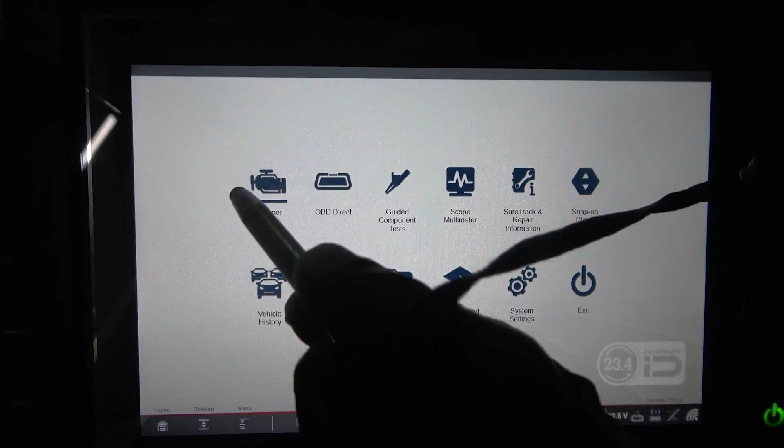Now I'm going to bring it up so we can scan the engine computer. So we're going to go to scanner. So right there, the scan tool has identified the vehicle, 2015 Hyundai Sonata with a 2.4 liter. So everything looks good. We're going to click OK. Let's do a code scan. Let's scan all the control units on the vehicle and see what we got. We're going to do a pre-scan. We have two trouble codes in the engine computer.

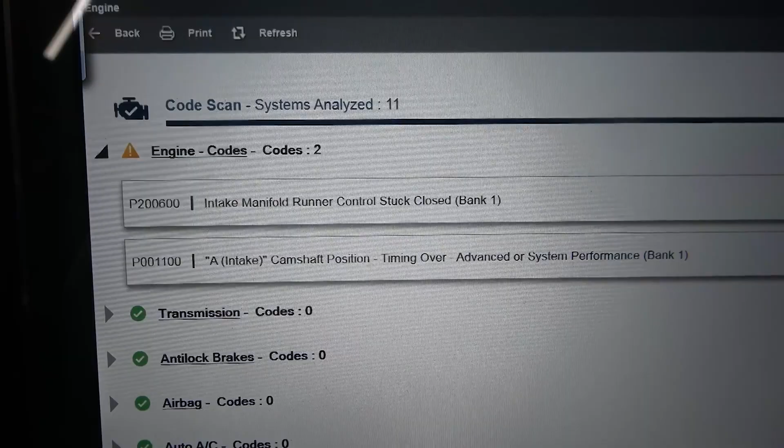Our first trouble code is P200600 and it says intake manifold runner control stuck closed bank 1. And then the second code is P0011 A intake camshaft position timing over advanced or system performance bank 1.

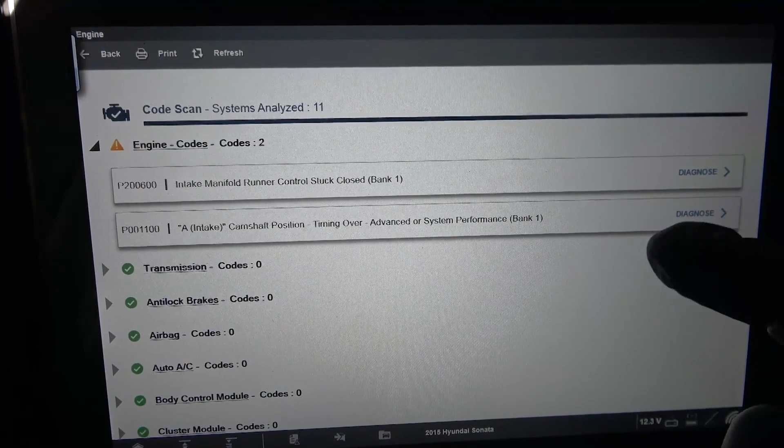Now I'm very familiar with these trouble codes. This first trouble code is usually caused by stuck flaps in the intake manifold or a defective intake manifold flap electric motor. And then the second trouble code is usually caused by a defective variable valve timing solenoid or a sticking camshaft phaser.

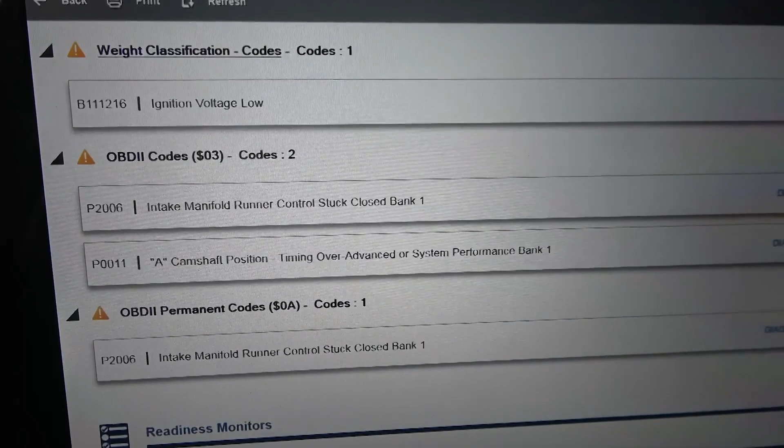So now I'm going to scroll down. Let's see what other trouble codes we have in the other control units. We have one code in the smart junction box, one in the weight classification control unit, and we have these two same codes again on the generic side of the tool. So the first one is P2006 intake manifold runner control stuck closed bank 1, and then the second one is P0011 A camshaft position timing over advanced or system performance.

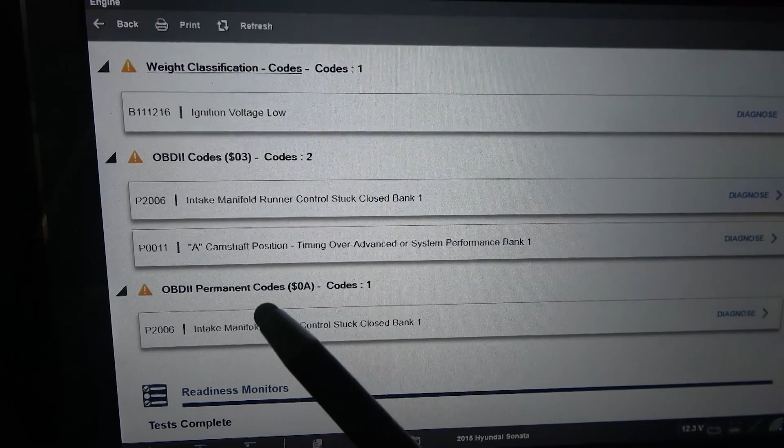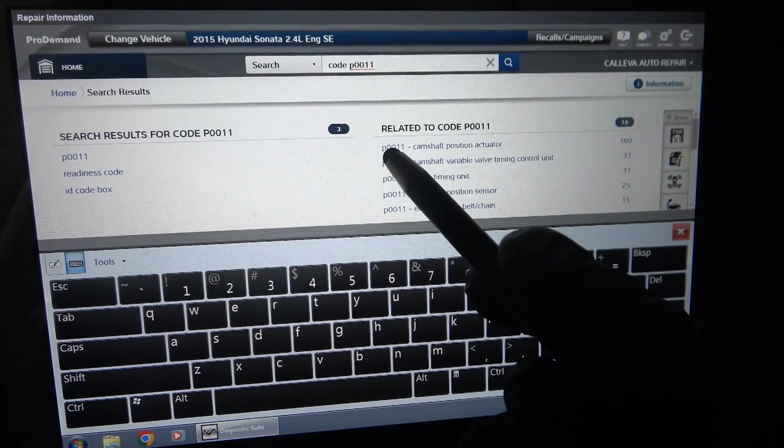Okay, so I'm already familiar with these trouble codes, guys. I don't have to look them up. I've done these several times, but in case you have a question, I'm going to look these up just for you guys. So we're going to look up P2006 and P0011. So let's go to our service information. We're going to look up P0011 first. Let's see what we got. So right here, P0011 camshaft position actuator. Let's click on it.

Now I'm going to go to real fixes first. This is repair information that Mitchell ProDemand makes available to us. This is basically information that other mechanics that have fixed this issue have provided to Mitchell ProDemand, and then Mitchell ProDemand gathers this information and makes it available to us. So when other mechanics like me dealt with this P0011 code, this is what they did. They replaced the variable valve timing control solenoid to fix this issue.

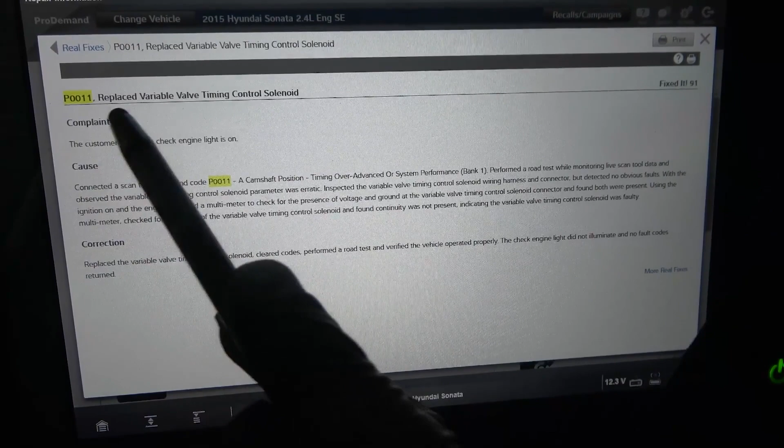And like I said earlier, this code is really common on these Hyundai Sonatas, and the issue 95% of the time ends up being the timing solenoid, the VVT solenoid. Actually, we can read what this guy is saying over here. He's saying that he replaced the variable valve timing control solenoid, cleared the codes, performed the road test, and verified the vehicle operated properly. So again, this code is usually caused by a defective VVT solenoid.

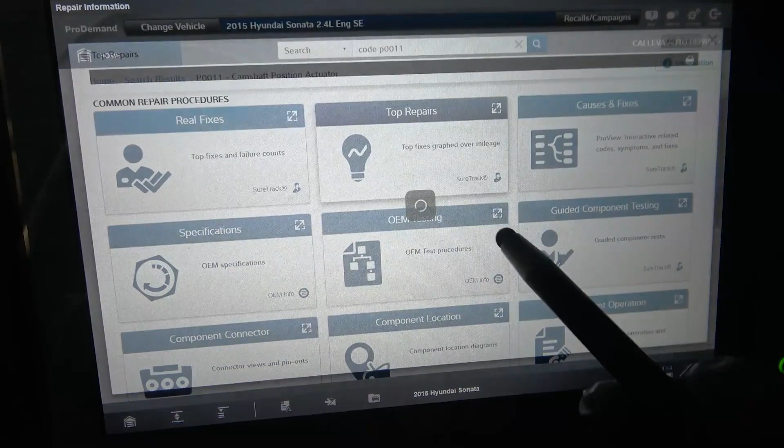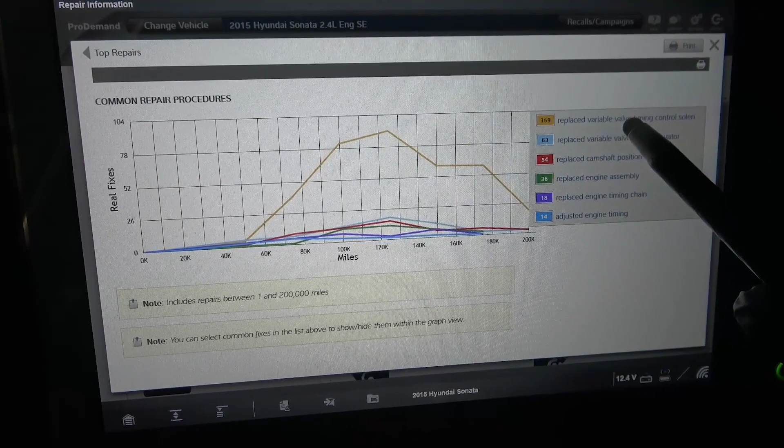We can also look at our top repairs. As you can see over here on this yellow graph, the problem that fixed this code was replacing the variable valve timing solenoid. So about this code, we're going to go under the hood. We're going to check the oil level first in the engine, and then we're going to check the wiring of the solenoid. If the wiring is good, then we're going to go ahead and replace the solenoid. So that should take care of the first code.

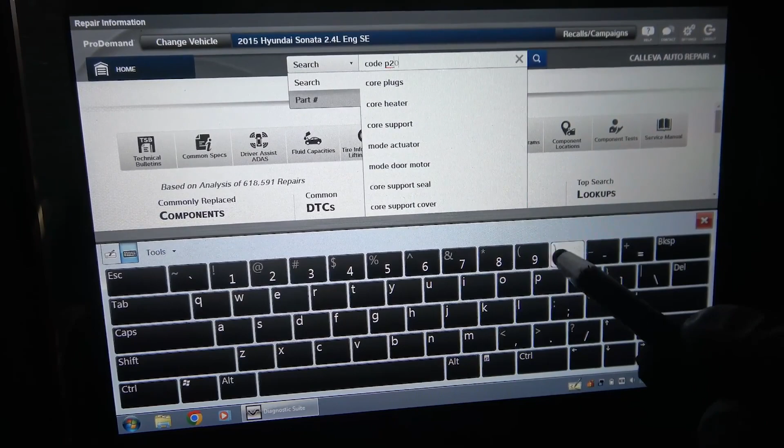Now let's look at the second code. The second code is P2006. So let's go back to our service info and look up that code, P2006. Okay, let's look it up and see what we got.

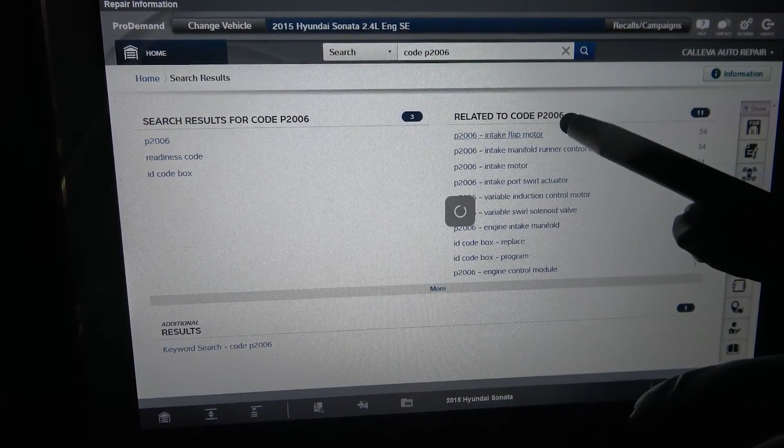So what does it say here? P2006 intake flap motor. Okay. So like I said earlier, it's usually the flap inside the intake that sticks, or the motor itself that controls the flap on the intake gives up. So let's read the real fixes. This information is very good to have, guys. So let's read and see.

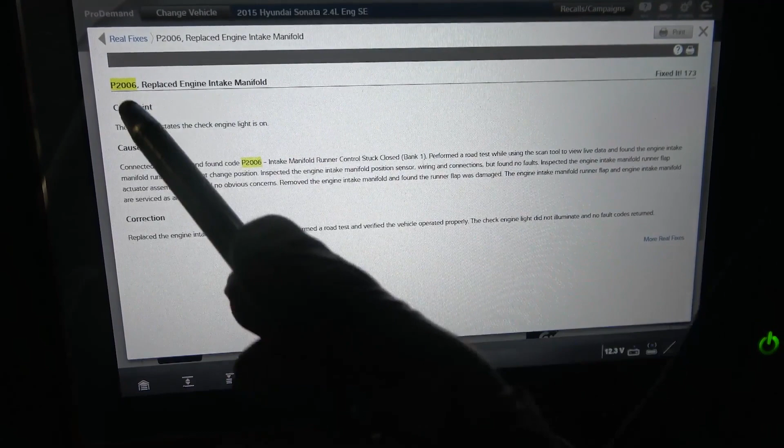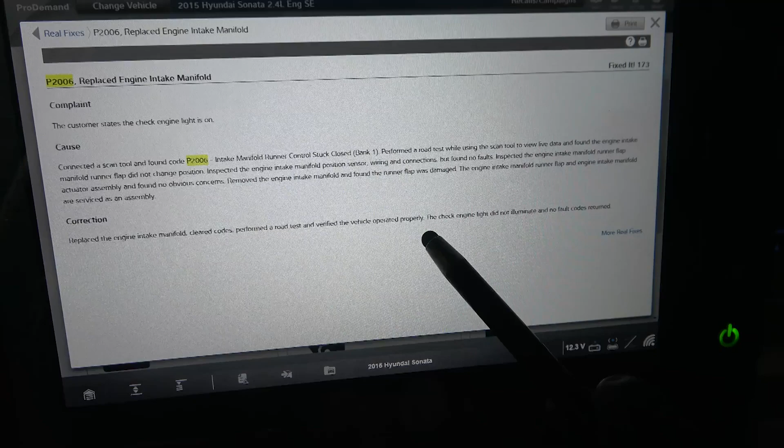Replaced engine intake manifold. That's good to know. So when this trouble code set, they ended up replacing the intake manifold to fix this code. I guess if the problem is the motor, I believe it's hard to get the electric motor by itself. You have to get the whole intake manifold. So let's read here. Replaced the intake manifold, cleared codes, performed the road test, and verified the vehicle operated properly. The check engine light did not illuminate, and no fault codes returned.

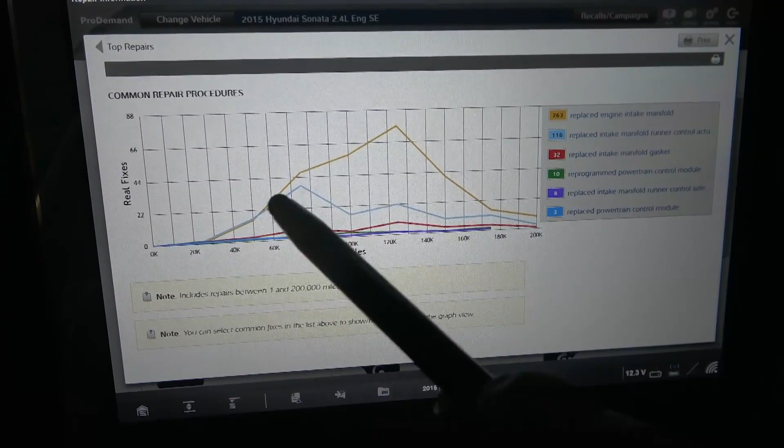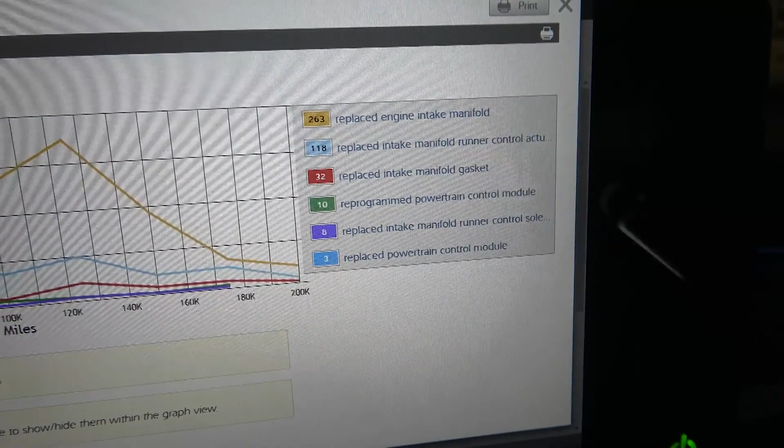Okay, that's good. So this is good information to have. This already gives me direction to fix these two problems that we have. Let's go to top repairs. So let's look at this yellow graph. The yellow graph is actually what fixed this code the most. So when this code was set, the fix was replacing the intake manifold. Right here, replace engine intake manifold. All right, that's good to know. Now we need to go under the hood and do some tests.

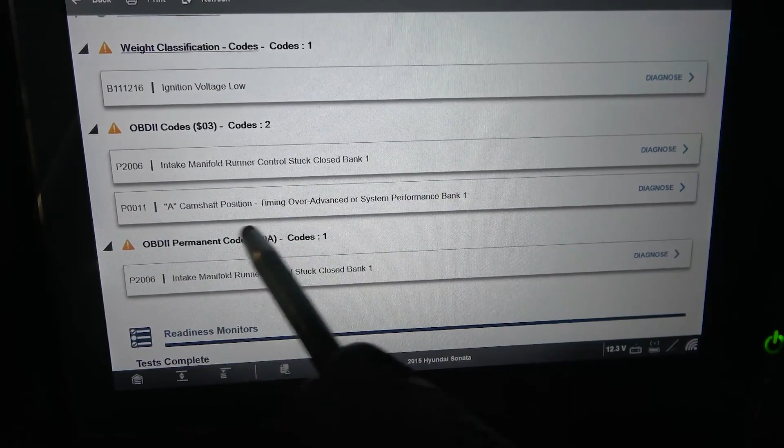So we know this first trouble code is fixed by replacing the intake manifold, and this second trouble code is fixed by replacing the VVT solenoid. Now, just because service information gives us this wonderful info doesn't mean we don't have to do our tests, okay? These are not silver bullets. We have to test the wiring of these solenoids and make sure that they are getting power and ground. The VVT solenoids on this vehicle receive power and controlled ground from the engine computer. We have to make sure that that's there at the solenoid electrical connector.

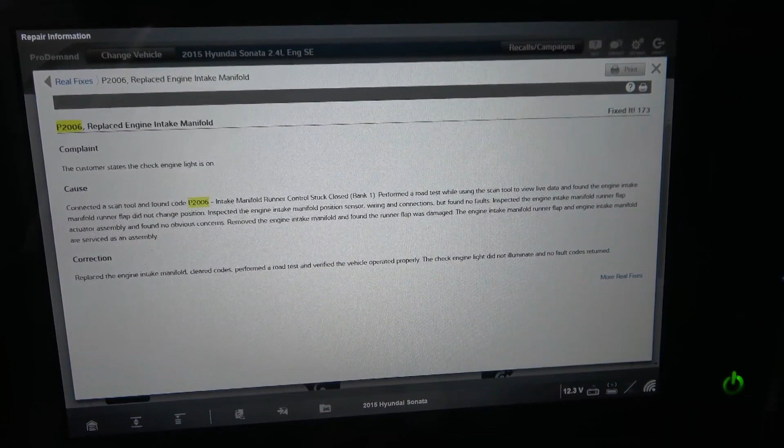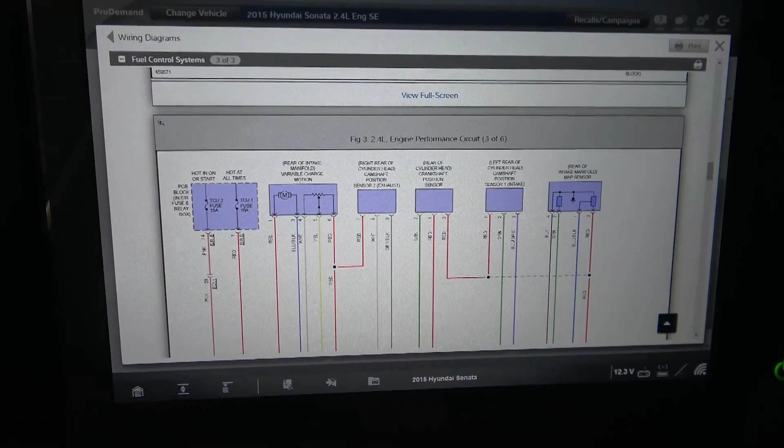And then after that, we're going to have to test the electric motor of the intake flap. If the electric motor of the intake flap is receiving power and ground from the engine computer, then the issue will be the motor, okay? So now I'm gonna back out. Let's go to wiring diagram. Now we're gonna go under the hood and do some tests at the VVT solenoid and the intake manifold flap motor. We're gonna remove our engine cover. This engine cover just pops off. We're gonna get it out of the way.

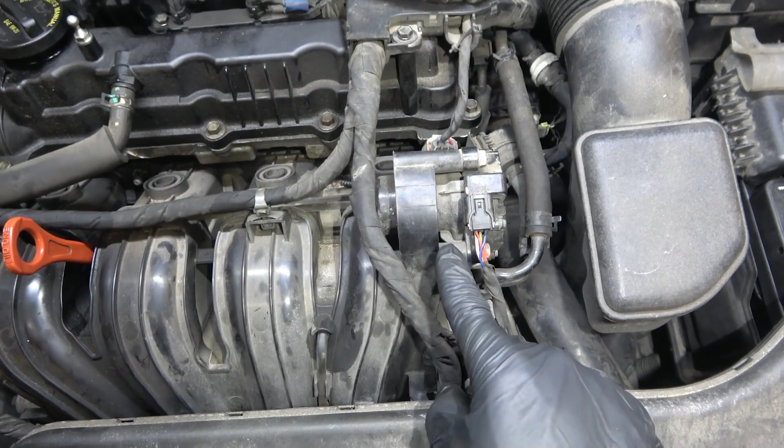So here is our intake flap motor. This is the electric motor for the intake flap. I am going to test the motor first. If this motor is bad, we're gonna have to replace the entire intake manifold, because Hyundai says that they do not sell the electric motor. You have to buy the whole intake manifold. So this is why the real fixes on our service information recommended replacing the intake manifold to fix the P2006 trouble code.

Okay, so now I am going to back probe all these wires. The electrical connector of this flap motor has 5 wires. 2 wires will be for the electric motor, and the other 3 wires will be for the position sensor of the flaps. I'll get all these wires back probed, and then I'll bring you guys back up. I'm gonna remove this air duct so we can have enough room around the intake manifold. We are back probing all the 5 wires at this electrical connector. So now let's see what we got on the lab scope.

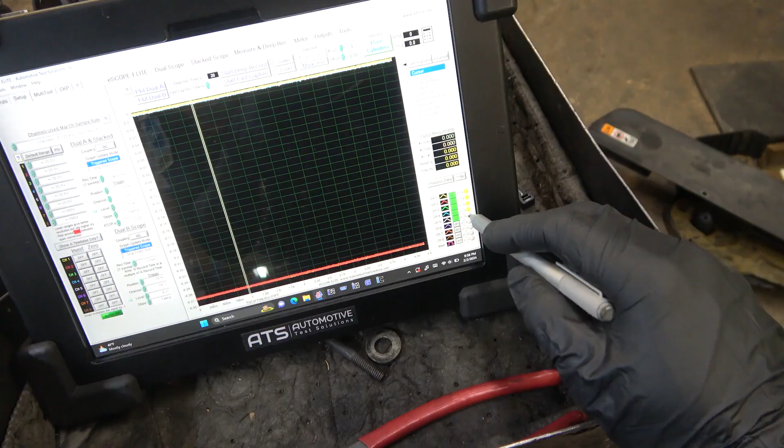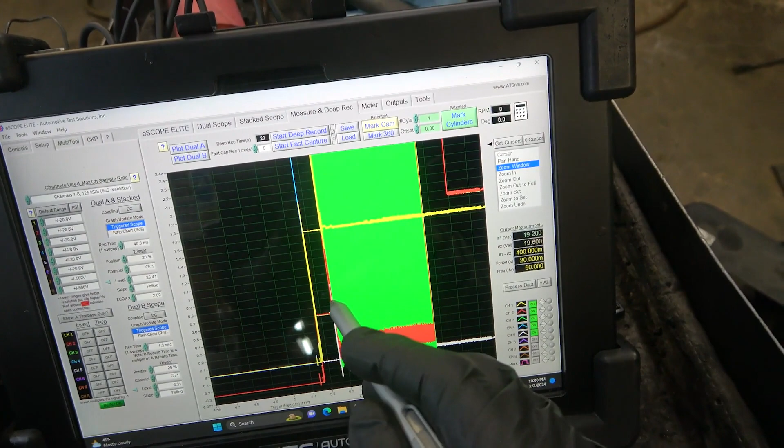Okay, so we're gonna deep record this. Now I'm gonna go in the vehicle and turn the key on and see what we got. So the key is on in the vehicle. Let's look at our lab scope screen. Let's bring our zoom window here. So all of this is control coming from the engine computer. Okay, so this tells me that the wiring of this motor is good.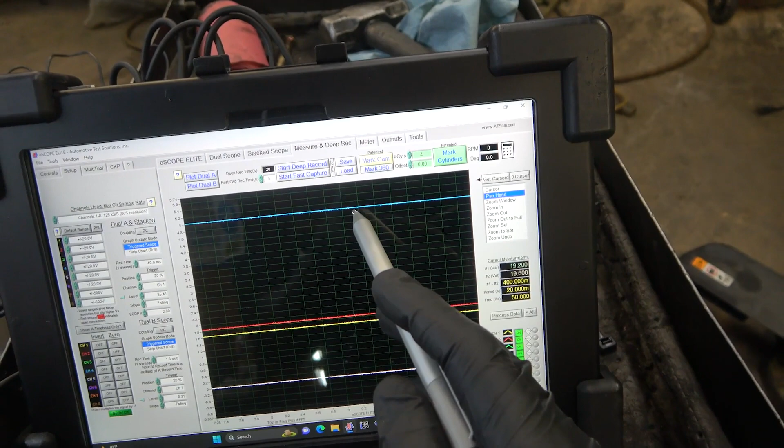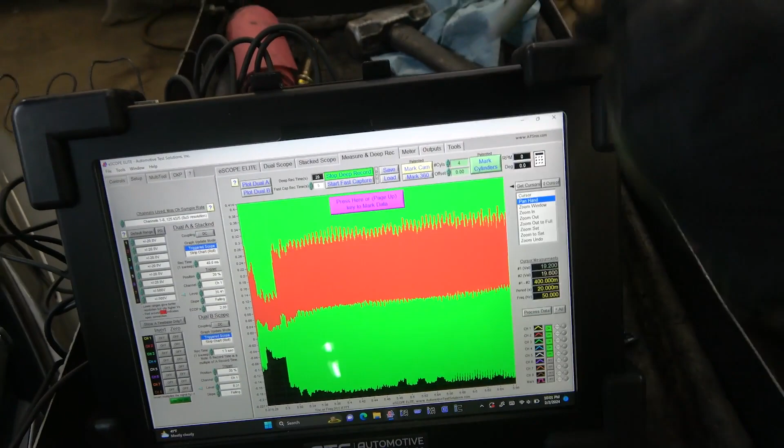Okay, so we have about 5 volts on the blue trace, and then about 1 volt on the red trace. So 1.8 volt on the red trace, 1.6 on the yellow trace. So without even starting the engine, I can already tell that this flap motor is actually receiving control from the engine computer.

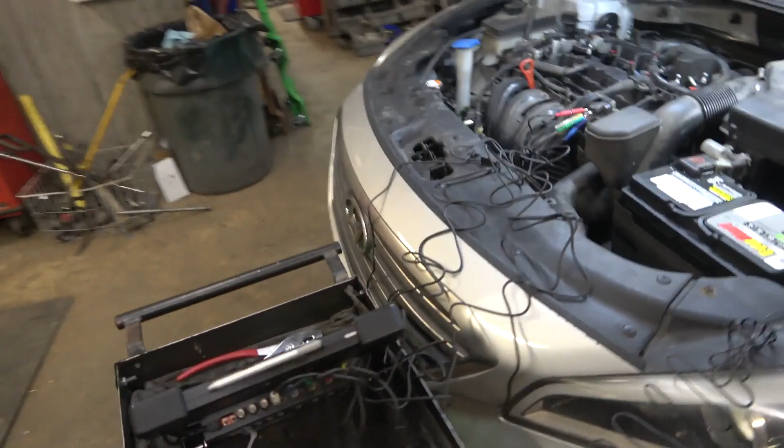Okay, now I'm gonna go ahead and start the engine. Let's see what kind of voltages we're gonna have over there. So the engine is running. Let's see what we got. Okay, so here's what we have with the engine running. So I'm gonna pause this. I'm gonna go in the vehicle and turn off the engine. Let's analyze the data before we make the call.

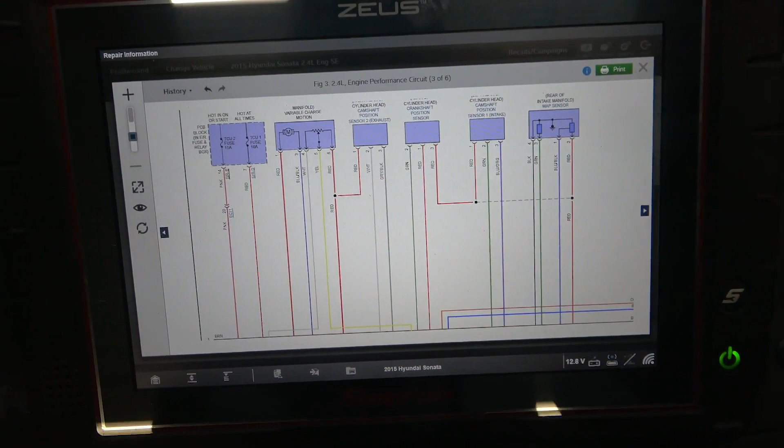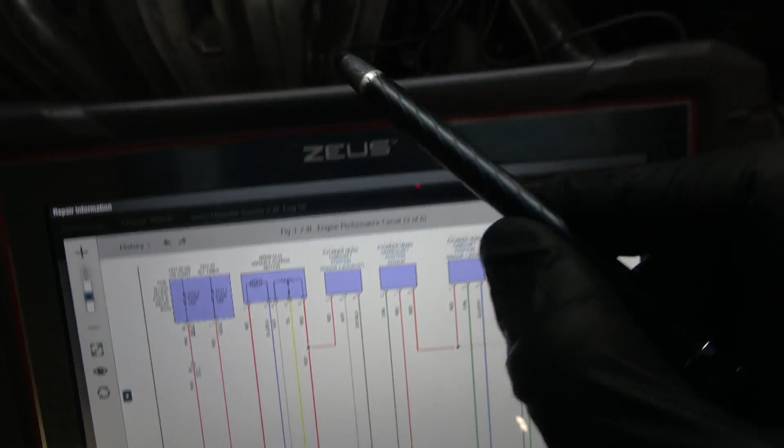If we check the electric motor on the wiring diagram, here is our intake flap motor. We have a red wire for the motor and the blue wire with a black tracer. So these 2 wires are the wires for the electric motor over here. Okay, and then these other wires are our position sensor wires.

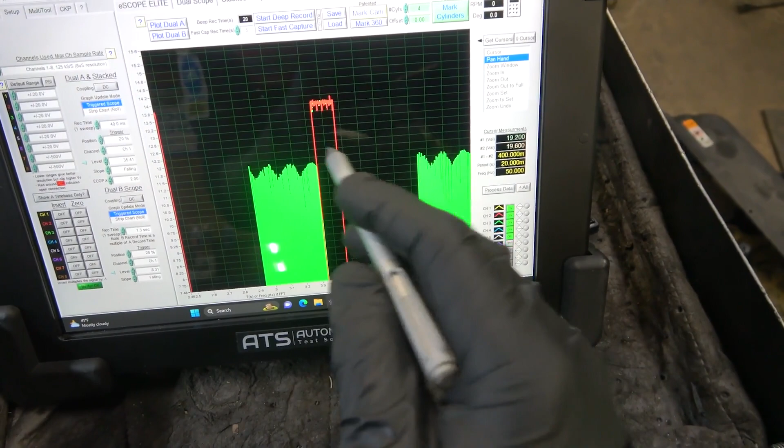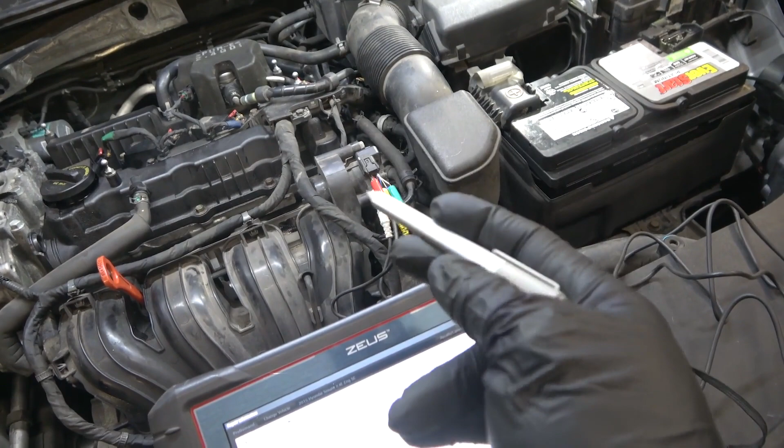Okay, so now if we analyze what we have on the lab scope, let's get a zoom window. Okay, so this over here is the control coming from the ECM to control the motor. So this tells me that the wiring is good. The flap motor is actually receiving control from the engine computer, because if we follow the wires at the flap motor, they go to the engine computer right there.

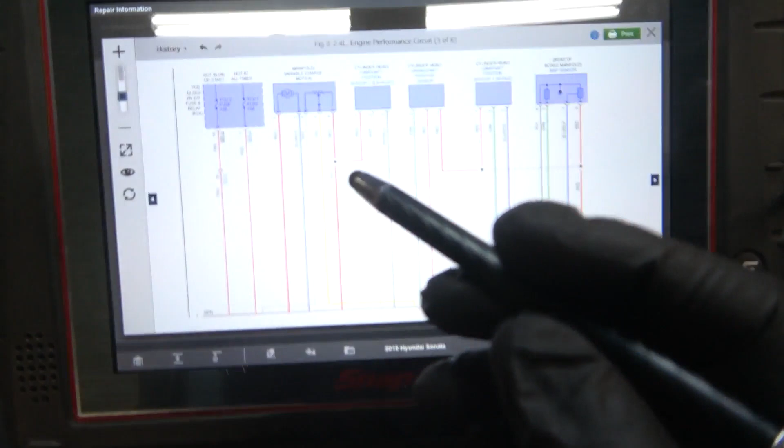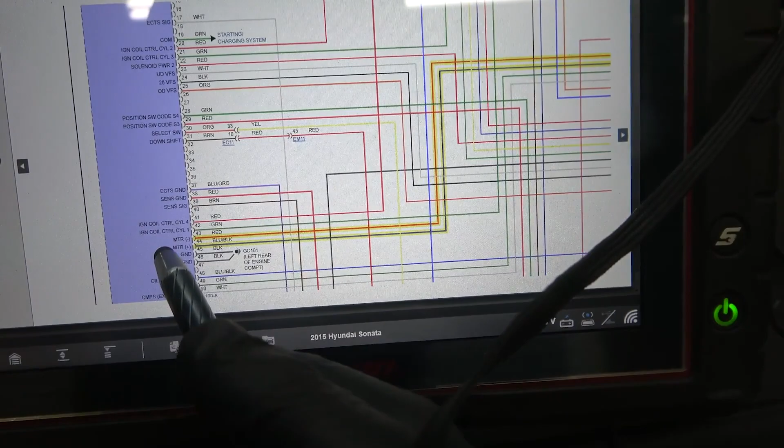So according to this wiring diagram, let me highlight these wires over here. If we follow these two wires that come from the flap motor, they go across this page, and they go right here. What does it say? Motor positive and motor negative. Okay, so these two wires are coming from the engine computer.

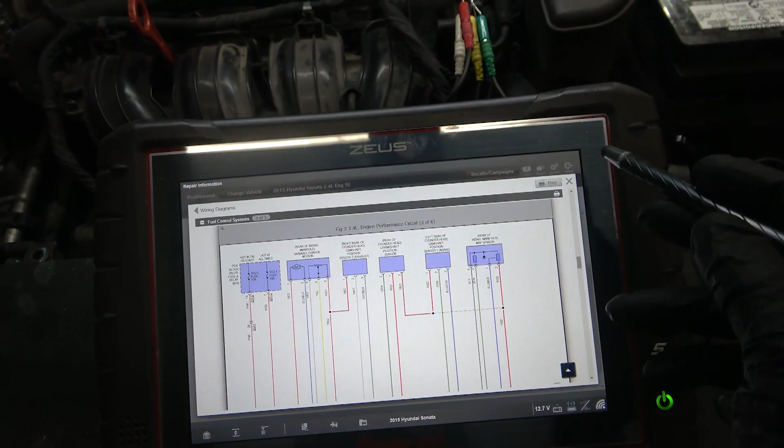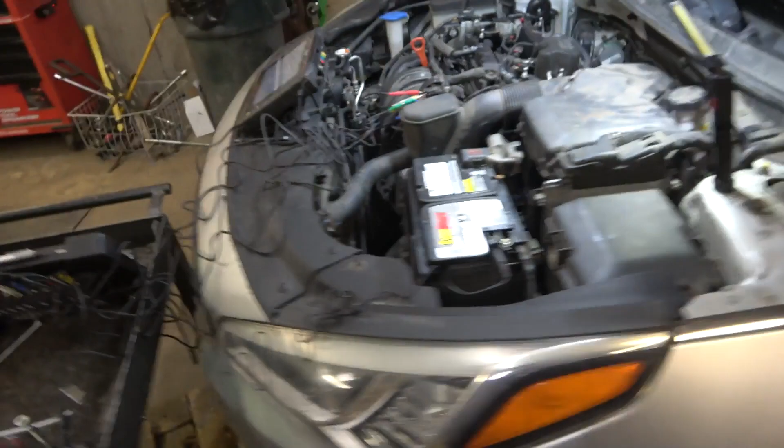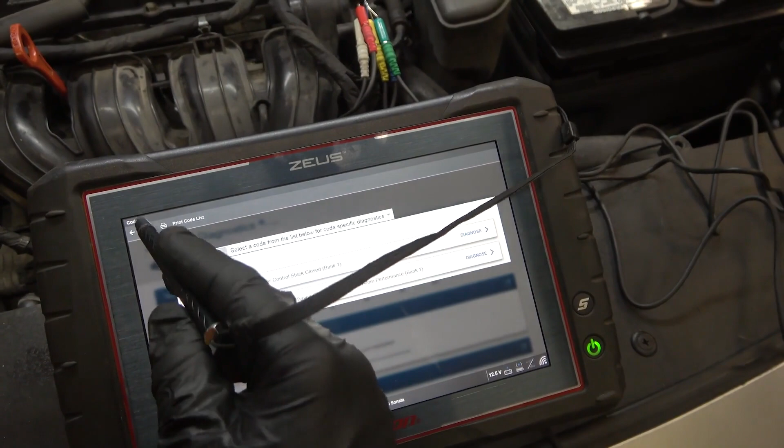Okay, now let me see if I can bidirectionally control this motor with my scan tool. Let me turn on the key. Let's make sure the key is on. What I'm about to do right now is just to double check, but we can already make a definitive call about this. Since we have a manifold runner code, this code over here, our problem is this motor. It's this guy.

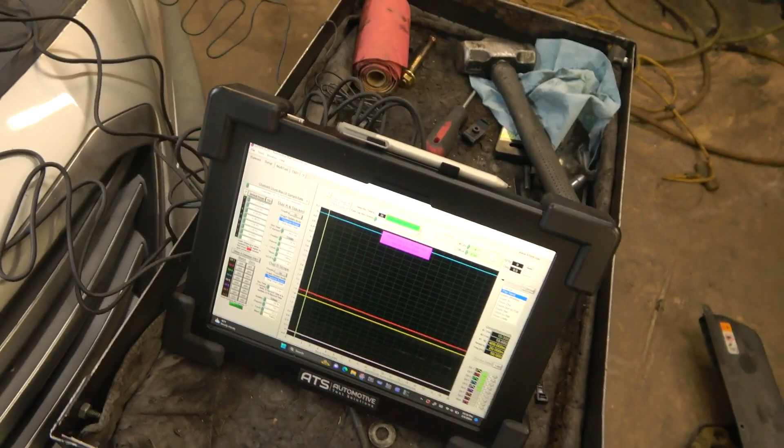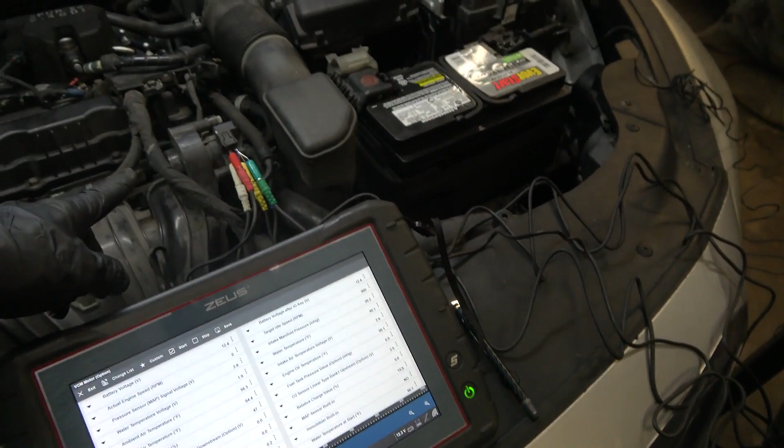Perform test with key on, engine off. Okay, so we're gonna turn on this motor here with the scan tool, and then we're gonna watch our lab scope and see what we're gonna have there. So let's go to start. Look at that. Stop. That's odd though. It looks like our motor is working, and we have our control here on the scope.

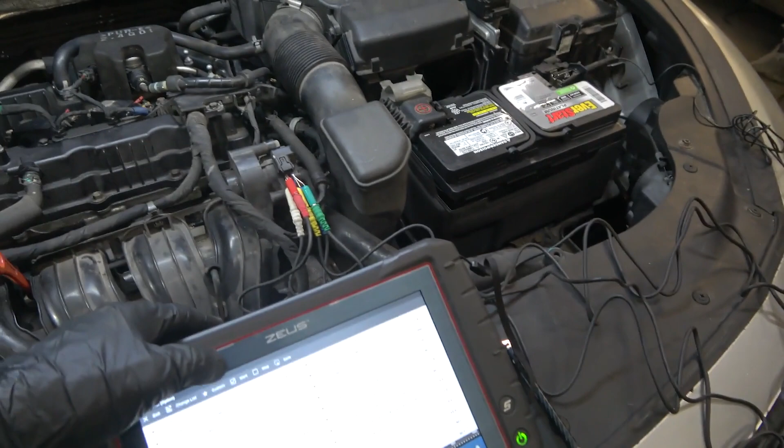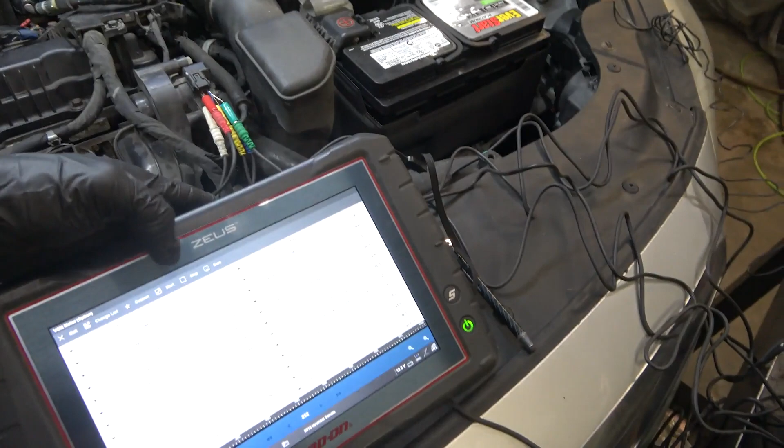We're going to try that again. I'm going to turn this on. Now this is making noise. The question is, are the flaps moving? I don't know, maybe the flaps are not moving in the intake. So let's stop this. So we definitely have something here. Let's pause this. Let me turn these. Okay. I don't know why this little square wave over here is not consistent. Let me turn this one on.

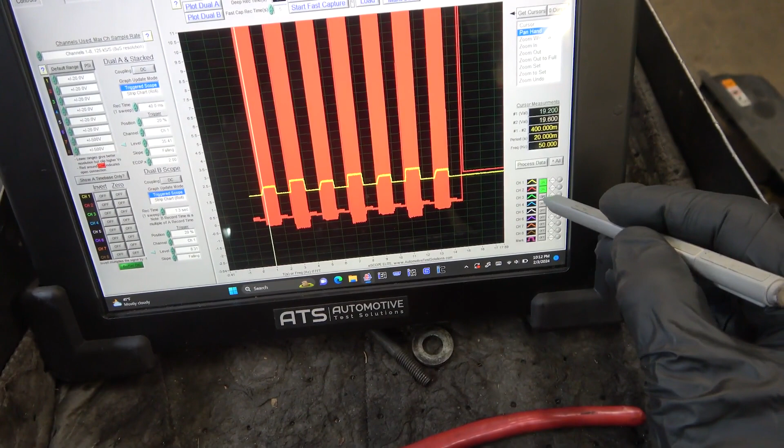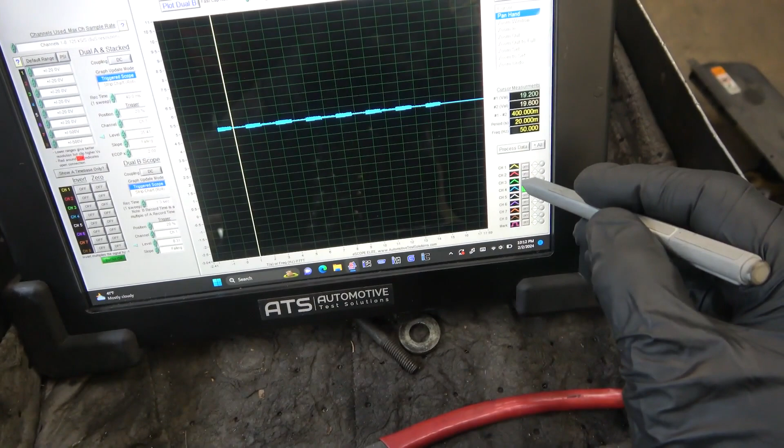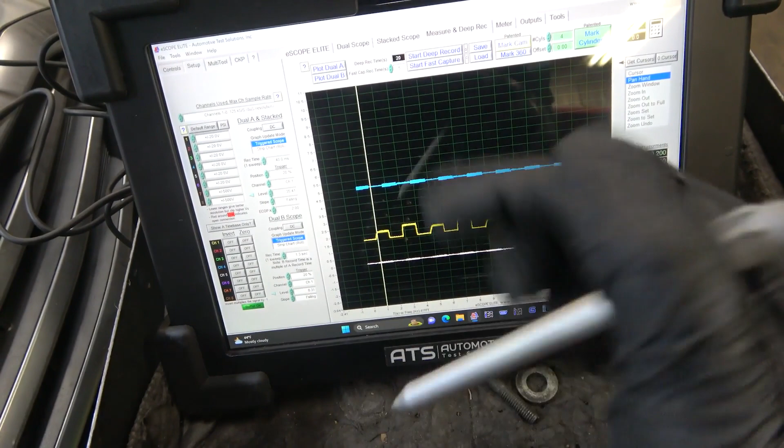Okay, so it looks like the blue trace is our 5-volt reference for the position sensor. The white trace is the sensor ground. The yellow trace is our sensor signal. Okay, so yeah, this is sticking. When we turn on the electric motor, we're basically toggling the motor. This should be consistent. These square waves should be consistent.

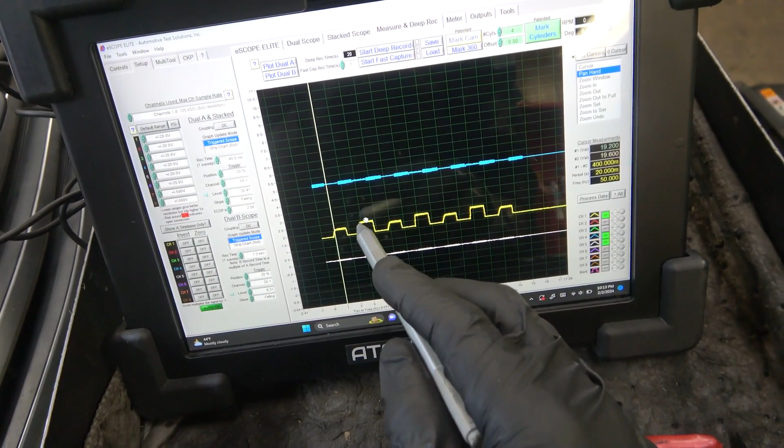You see how one is taller than these ones? I don't believe this is normal. I don't think this is normal. This is a problem. And then the green trace and the red trace are actually our motor control. This motor here has a problem. Okay, this motor has a problem.

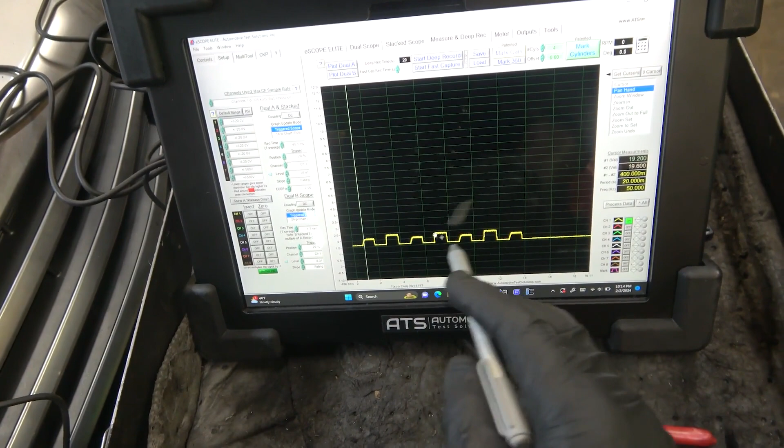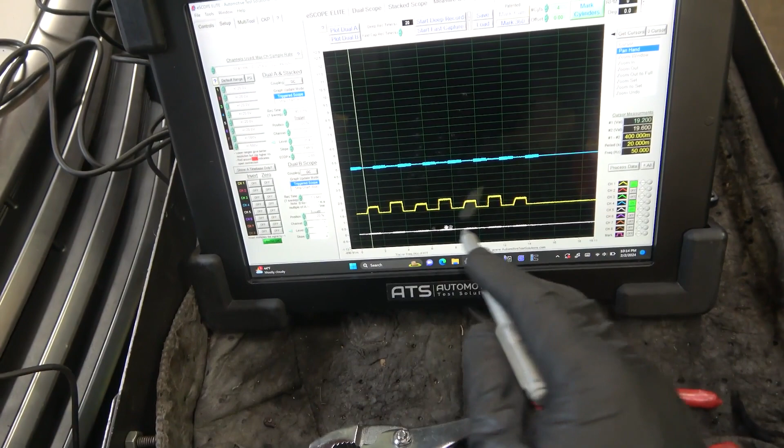I don't like what I see over here on the signal of the position sensor. I don't like this square wave over here. Okay, so we have good reference voltage on the blue trace. We have good ground. Our ground is not elevated. Okay, so this over here should be consistent.

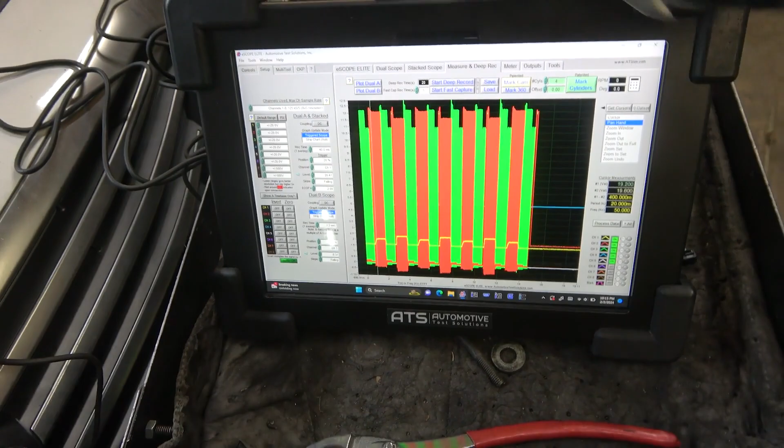Okay, our motor control also looks good. So we have an intake manifold flap stuck code. Our motor wiring is good. The problem is this motor. Okay, we're gonna have to replace this intake manifold to fix this code. So let me go back. So to fix this code over here, this one, we're gonna have to replace the intake manifold. So now let's test our VVT solenoid.

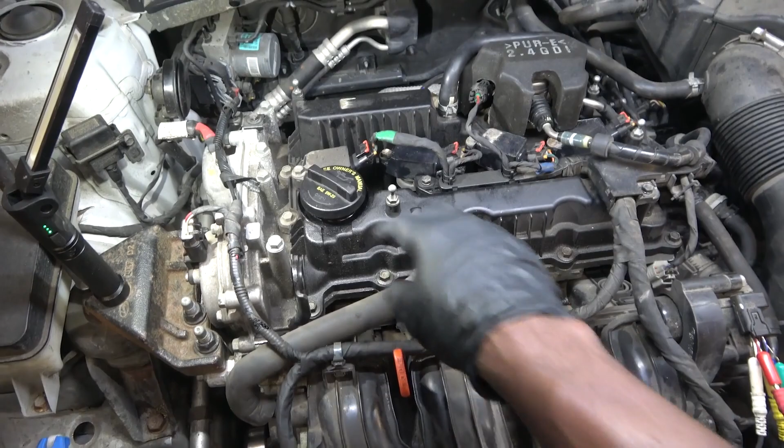We're gonna back probe the VVT solenoid wiring so we can test that as well. I'm gonna back probe the VVT solenoid wiring and then I'll bring you guys back up. This over here is the intake manifold. This is the intake camshaft. So right over here in front of the vehicle is the intake camshaft. Over there is the exhaust manifold, and this is the exhaust camshaft. And this over here is our intake VVT solenoid. So what we're gonna do is we're gonna take 2 test leads from our lab scope and back probe these 2 wires over here.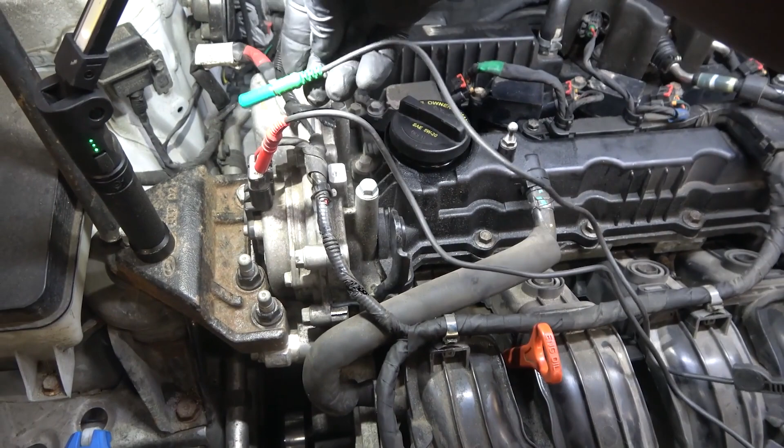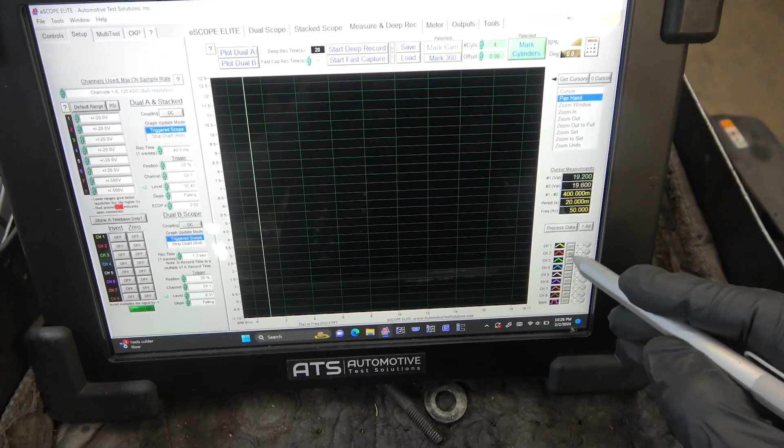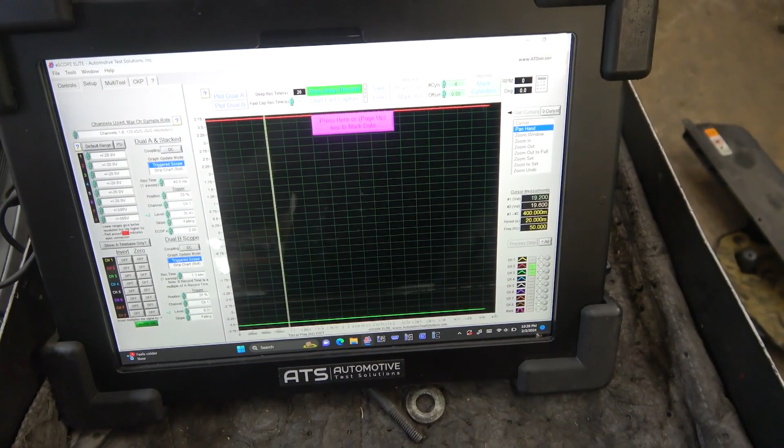Okay, so we got the red trace and the green trace. All right, so we got the green trace and the red trace over here at the VVT solenoid of the intake camshaft. We can remove these test leads over here. We are done. We know the motor wiring is good, so this motor is bad. Okay, so let's look at our lab scope. So we're gonna turn off all these channels. We're gonna turn on our red trace and our green trace. Okay, we're gonna record this. I'm gonna go in the vehicle and start the engine. Let's see what we got.

So as you can hear, the engine is running. Check this out. So we definitely have control at the solenoid. Okay, so the solenoid is being controlled. So the wiring of the solenoid is good. So the problem is the solenoid, guys. Look at what we have on the lab scope.

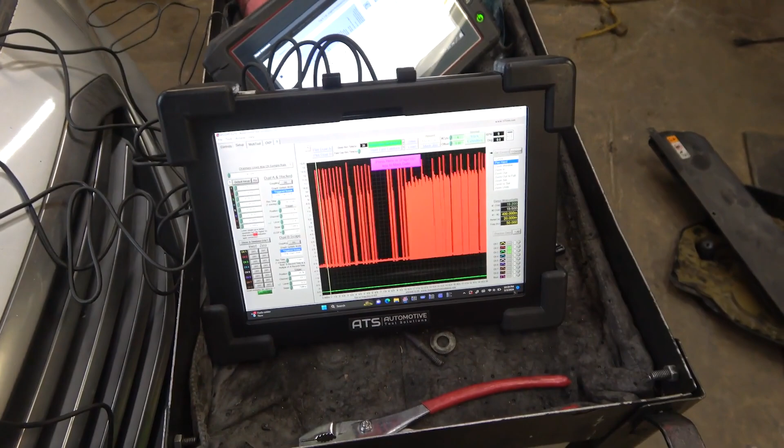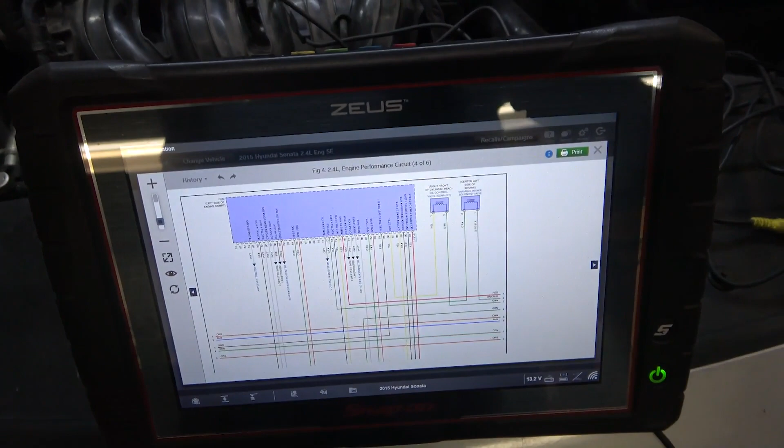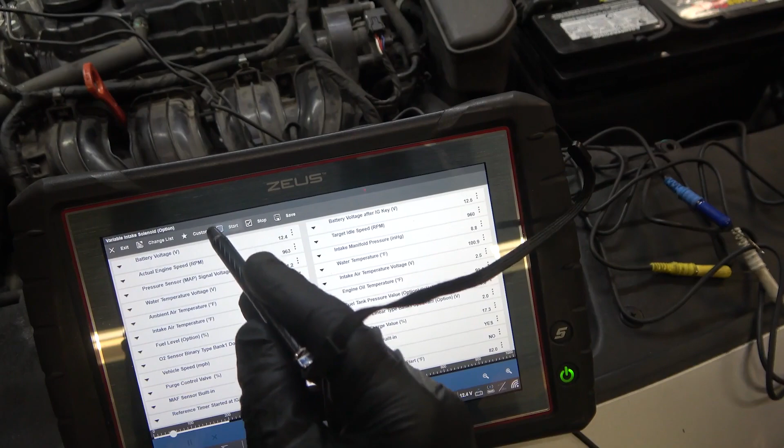So we can actually try to see if we can turn on this solenoid with our scan tool. Variable intake solenoid, okay. Let's see if we can turn it on. So I'm turning it on, nothing is happening. I mean, I'm looking at my lab scope screen as I'm doing this. I hope I can get the lab scope and the scan tool here in one shot. So watch this. I turn this on, off, on, off.

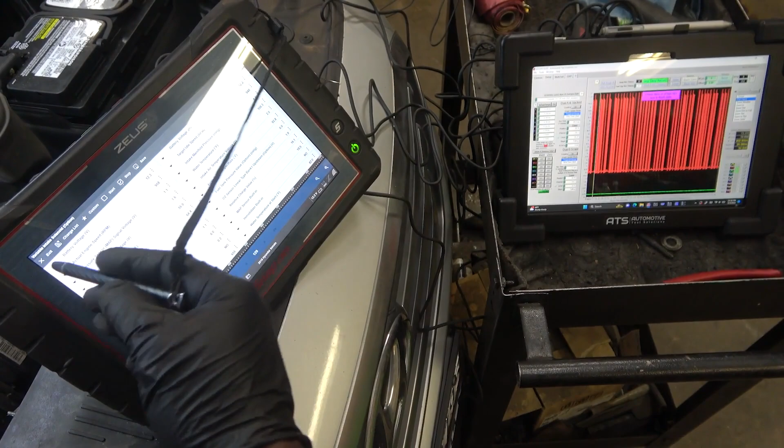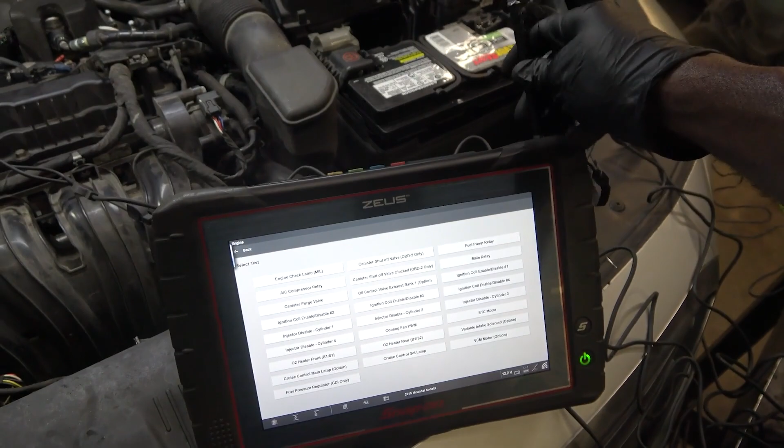Okay, so what this tells me is that the wiring is good because our solenoid is receiving the control. So the control is there. The solenoid is getting power and ground. Okay, the wiring is good. So the solenoid is the problem. All right, guys. So I'm gonna go in the vehicle and turn off the engine. So we are done, guys. We are done with our diagnosis.

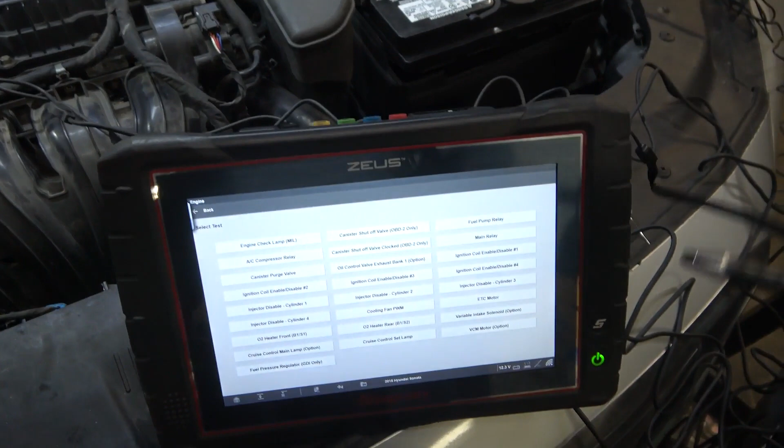Okay, we are done. At this point, I feel comfortable replacing the solenoid and the intake manifold. We just need this motor, but since we can't get the motor by itself, we're gonna have to replace the intake manifold. Let me back out. I'm gonna clear these codes. Let me see if they're gonna come back right away. We got no codes present. Let me start the engine and see if those codes will come back.

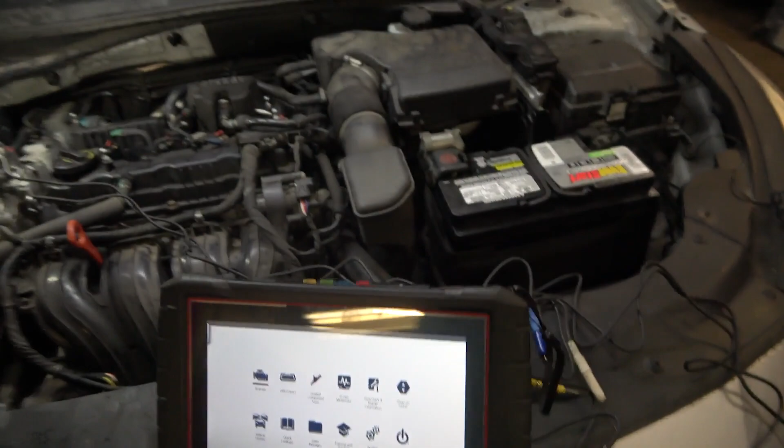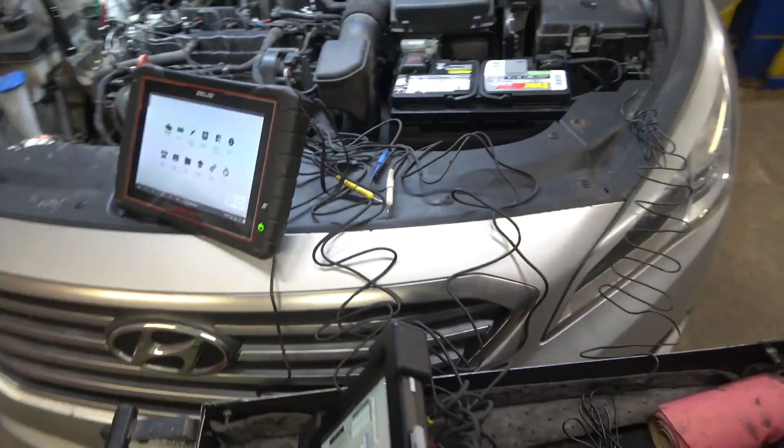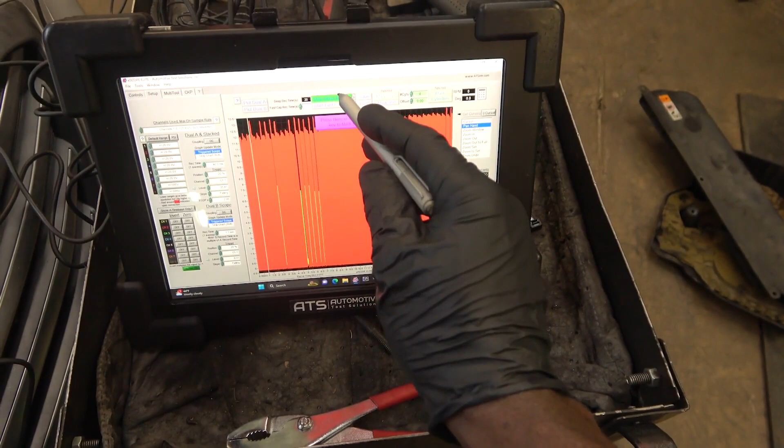So the engine is running. Let's see what we got. So no codes are coming back. I mean, eventually they will come back. So here's what we have on the lab scope screen. Let's stop this. Okay, so we definitely have control on both traces here. Okay, so we're still connected to the VVT solenoid. All right, so I'm gonna turn off the engine.

We are done with our diagnosis. Our intake flap motor is receiving control. The wiring is good, and our intake VVT solenoid is also receiving control from the engine computer. The wiring of the solenoid is good. Since we have a code for the solenoid and the flap motor, we're gonna have to replace the intake VVT solenoid and the intake manifold to fix these two codes.

Now, the intake manifold on this vehicle is very expensive from Hyundai. It's about $600. I talked to the customer. The customer actually asked me to install a used intake manifold. So we're gonna get an intake manifold from the junkyard. We're gonna install it, and then we're gonna get a new VVT solenoid, and we're gonna install that also. And after that, this will be fixed. I'm gonna call the junkyard and get an entire intake manifold. It's gonna come with the electric motor, the intake flap motor, but it's gonna be used. I'm gonna get that, and then I'll bring you guys back up.